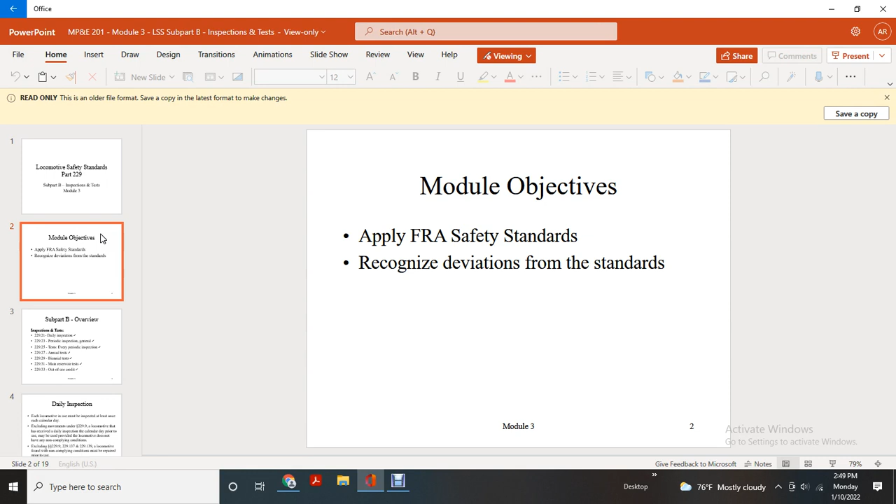Locomotive Safety Standards Part 229, Subpart B, Inspection and Testing, Module 3. Module objective: apply FRA safety standards recognize deviations from the standards. Subpart B, Approval, Overview, Inspection and Tests. Inspection and tests: 229.21 Daily Inspection, 229.23 Periodic Inspection General, 229.25 Tests Every Periodic Inspection, 229.27 Annual Test, 229.29 Biennial Test, 229.31 Main Reservoir Test, 229.33 Out-of-use credit.

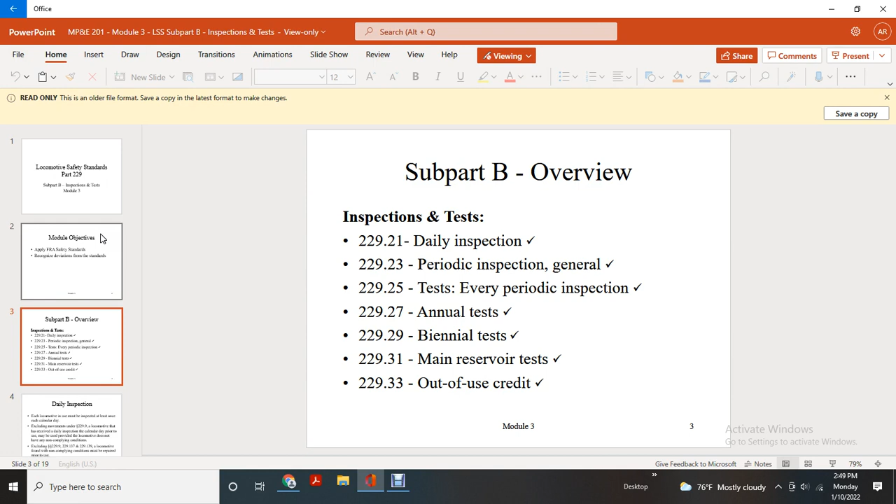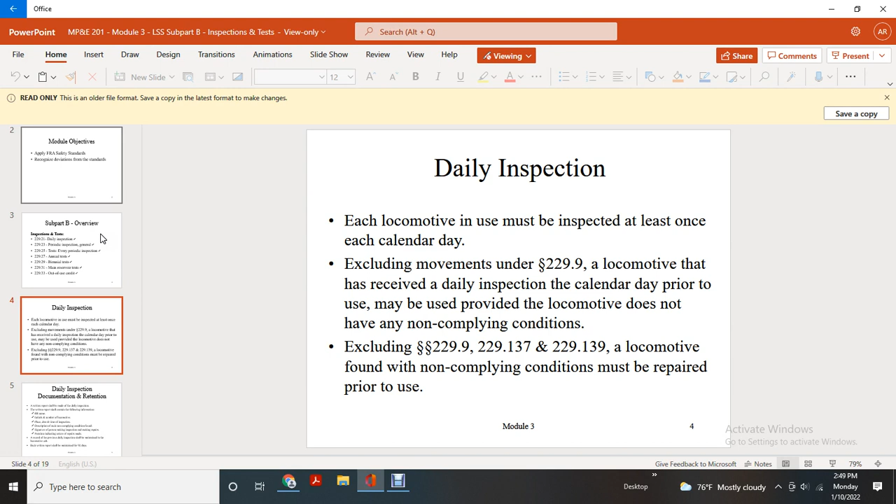Daily inspection: each locomotive in use must be inspected at least once each calendar day. Excluding the movement under 229.9, the locomotive has received the daily inspection for the calendar day prior to use, provided the locomotive does not have any non-compliant conditions. Excluding 229.9, 137, and 139, a locomotive found with non-compliant conditions must be repaired prior to use.

Daily inspection, documentation, retention. A written report shall be made of the daily inspection. The written report shall contain the following information: railroad's name, initials and number of the locomotive, the place, date and time of inspection, description of each non-compliant condition found, signature of the person making the inspection, and, for repairs, a notation indicating the nature of the repairs made. A record of previous daily inspections shall be maintained in the locomotive cab. Each written report shall be maintained for 92 days.

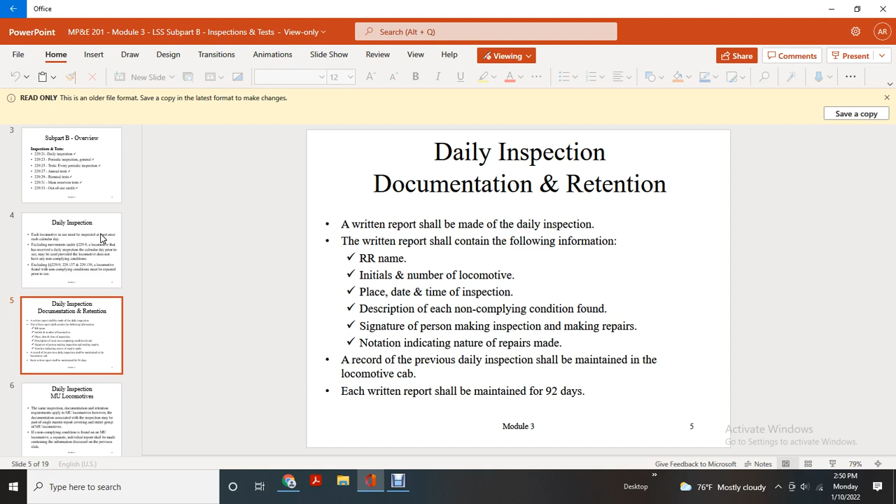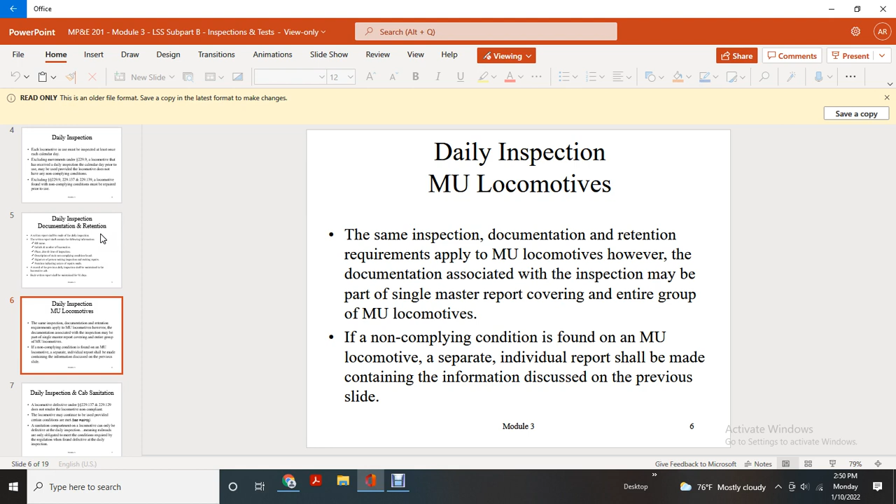Daily inspection, multiple units: the same inspection, documentation, and retention requirements apply to multiple unit locomotives. However, the documentation associated with the inspection may be part of a single master report covering the entire multiple unit locomotive consist. For non-compliant conditions found on the multiple unit locomotives, a separate individual report shall be made containing the information discussed on the previous slide.

Daily inspection, cab sanitation. A defect under 229.137 and 139 does not render the locomotive non-compliant. The locomotive may continue to be used provided certain conditions are met. See the sanitation compartment matrix. Where the defect is found on the daily inspection, the railroad is obligated to meet the conditions required by the regulation.

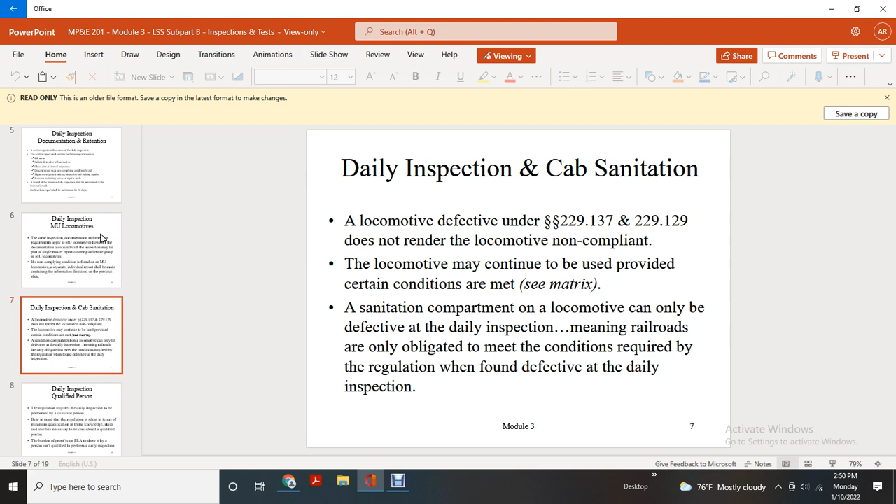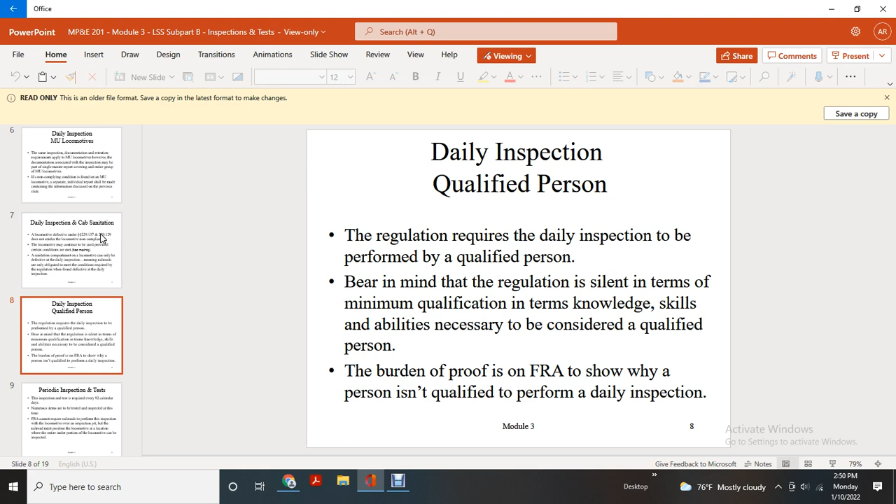Daily inspection, qualified person: the regulation requires the daily inspection be performed by a qualified person. Bear in mind the regulation is silent in terms of the minimum qualifications, training, knowledge, skill and ability necessary for the qualified person, so the burden of proof is on FRA to show why the person is not qualified to perform the daily inspection.

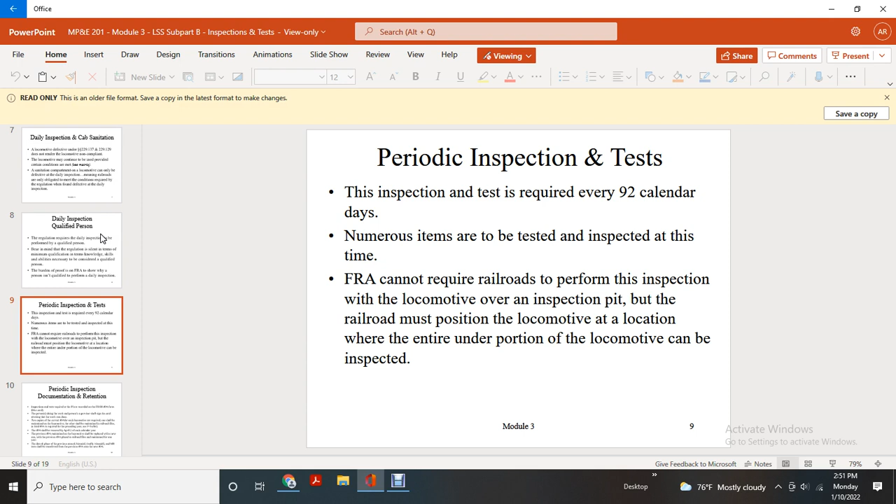Periodic inspection, documentation, retention. Inspections and tests of the PI are recorded on Form FRA F 6180-49A, the blue card. Each person doing the work or any person supervising shall sign the card attesting to the work done. Two copies of the current 49A for each locomotive are required. One shall be maintained on the locomotive. The other shall be maintained in the railroad files.

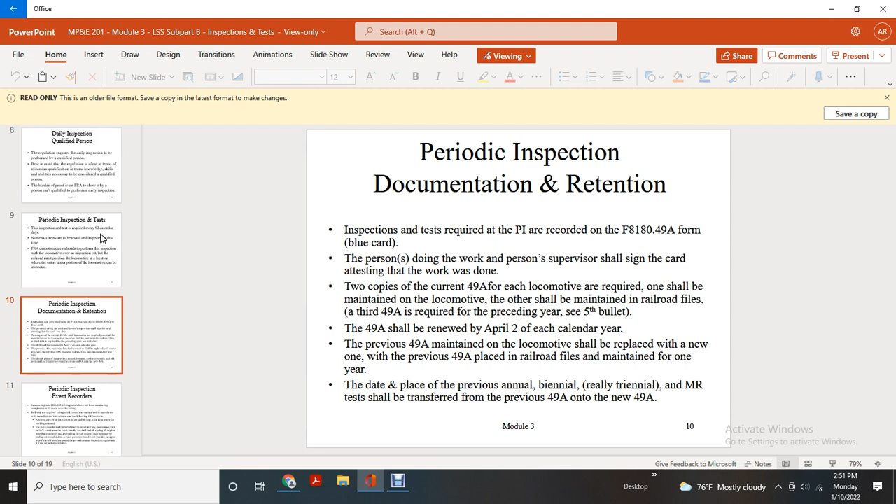A third 49A is required for the preceding year. The 49A shall be renewed by April 2nd of each calendar year. The previous 49A is removed from the locomotive when the new one is placed, with the previous 49A placed in the railroad files and maintained for one year. Date and place of previous annual, biennial, triennial, and MR tests shall be transferred from the previous 49A onto the new 49A.

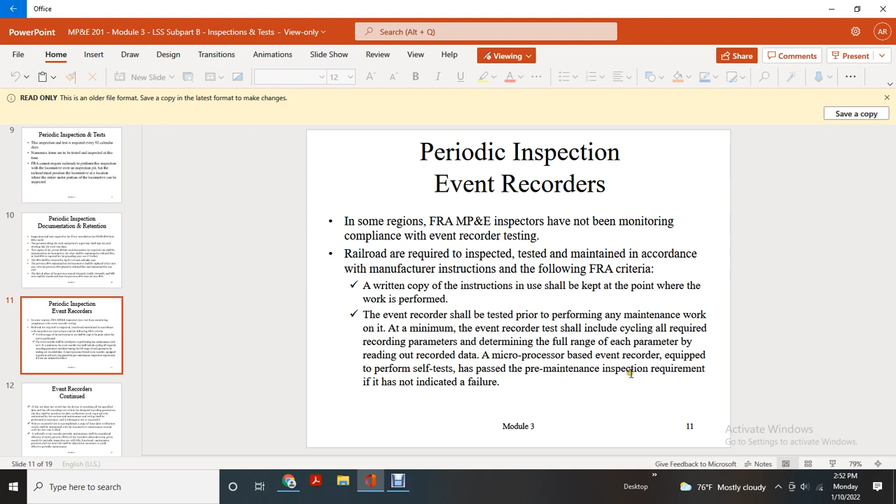A written copy of the instruction shall be kept at the point where the work is performed. The event recorder shall be tested prior to performing maintenance work on it, and at a minimum the event recorder test shall include cycling all required recording parameters and determining the full range of each parameter by reading out the recorded data. A microprocessor-based event recorder equipped to perform a self-test meets the pre-maintenance inspection requirement if it has not indicated a failure.

If the test does not reveal that the device is recording all the specified data, all the recordings of the designated recording parameters shall be noted with the defective data verification result, and maintenance and testing shall be performed as necessary until a subsequent test is successful. When a successful test is accomplished, a copy of the data verification result is maintained in the locomotive maintenance records until the next one is filed.

Railroad event recorder periodic maintenance shall be considered effective if 90% of the recorders inbound in any given month for periodic inspection are still fully functional. Maintenance practices and test intervals shall be adjusted as necessary to yield effective periodic maintenance. Annual testing: the inspection and testing is required every 368 calendar days. Numerous air related items are serviced at the time.

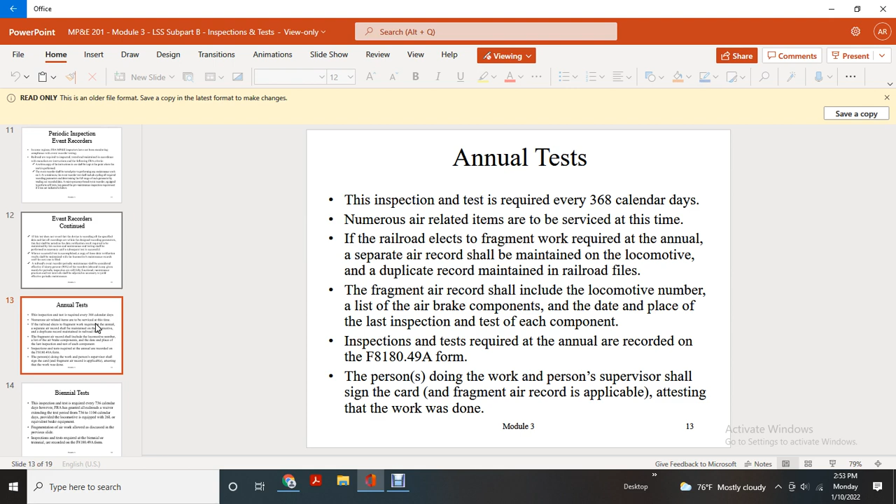If the railroad elects to fragment the air work required by the annual test, a separate record shall be maintained on the locomotive, with a duplicate record maintained in the railroad files. The air record shall include the locomotive number, the list of air brake components, and the date and place of the last inspection and test of each component. Inspection and testing required by the annual test is recorded on the Form 6180-49A. The person doing the work and the supervisor shall sign the card and air records applicable to testing when the work has been done.

Biennial testing. The inspection and test is required every 736 calendar days. However, the FRA granted all railroads a waiver extending the test period from 736 to 1,104 calendar days, provided the locomotive is equipped with 26L or equivalent brake equipment. The air work is as discussed in the previous slide. Inspection and testing required by the biennial or triennial test is recorded on the Form 6180-49A. Main reservoir tests.

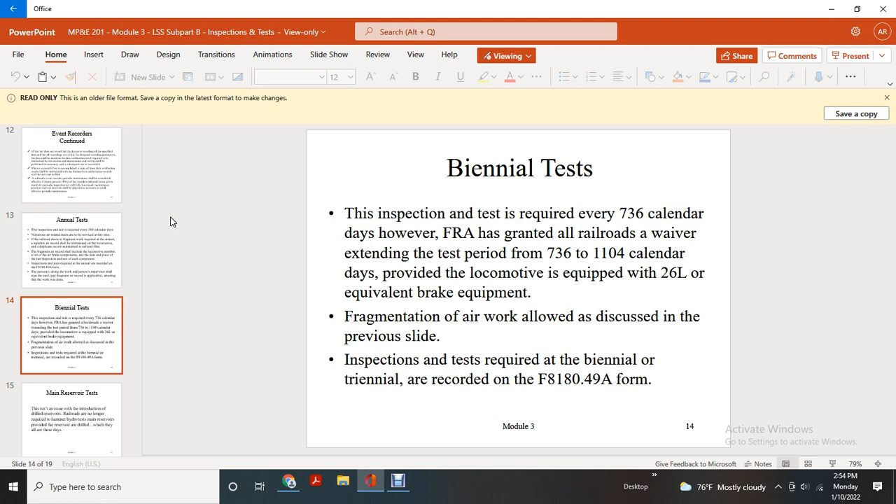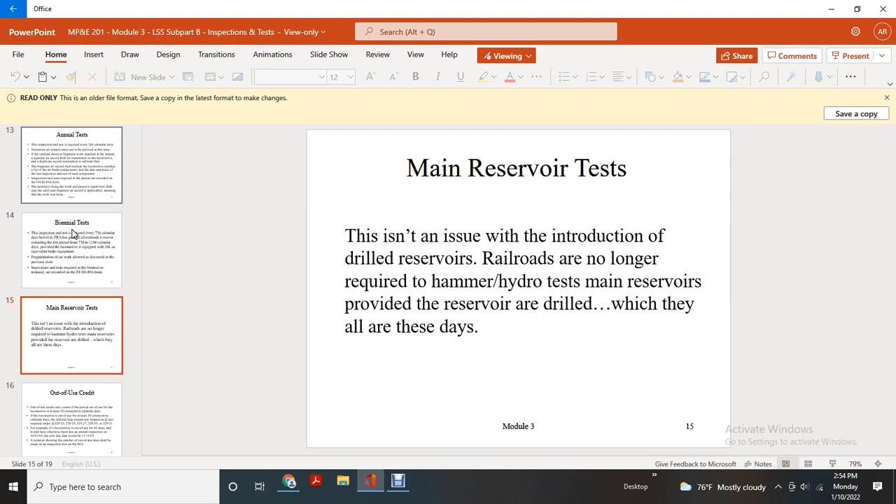With the introduction of drilled reservoirs, railroads are no longer required to hammer and hydro test main reservoirs, provided the reservoirs are drilled, which they all are these days. Out of use credit. Out-of-use credit only accounts for periods when the locomotive is out of use at least 30 consecutive calendar days. For locomotives out of use at least 30 consecutive calendar days, the railroad may extend the inspection and testing required in 229.23, 25, 27, 29, and 31.

For example, a locomotive out of use for 45 days that would otherwise have been due for annual inspection on October 1st, 2003 would have a new date of November 15th, 2003. Notation showing the number of out of use days shall be made on the inspection line of the 49A.

Form 6180-49A. In late 1989 the FRA allowed railroads to computer generate their own 49A forms provided they contain all of the elements of the original 49A form. In addition, the FRA also said information on the computer generated 49A form must be in the same order as the original, and the form must contain the original signature of the person doing the testing or the work that was completed. This is covered in CFR Part 229 Subpart B, and this is the end of Module 3.